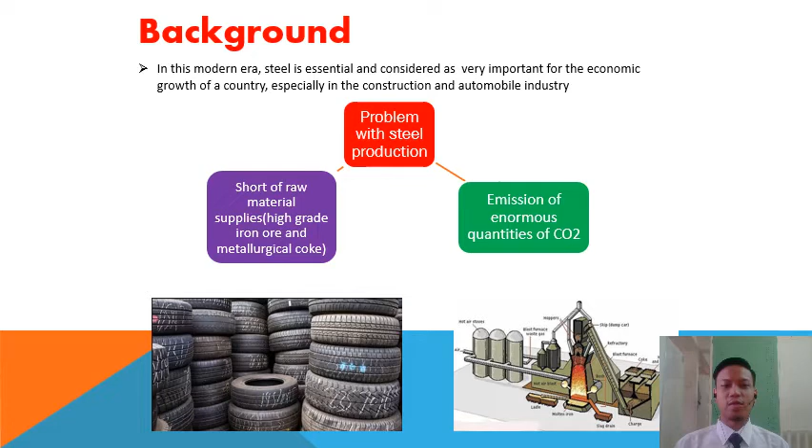As for the background of this project, in this modern era, steel is considered an essential and very important factor for the economic growth of a country, especially in the construction and automobile industry. However, the steelmaking industry is considered one of the largest energy consuming sectors. So the problem with steel production is that it has a shortage of raw material supplies, which is high-grade iron ore and metallurgical coke, and also the emission of CO2 in enormous quantities.

As for the problem statement for this project, it can be divided into four. First, the production of coke requires high energy and cost, where the coal needs to be heated up to around 1000 degrees Celsius for about 22 to 24 hours. Next, the production of coke also results in byproducts such as benzene, toluene, xylene, ammonium naphthalene, tar vapor, and also 218 kg of carbon dioxide.

Next, sintering also releases almost the same amount of carbon dioxide, which is around 216 kg. And finally, the management of waste tire disposal is challenging due to its poor biodegradability and carcinogenic property. So as a solution to this problem, char made from waste tires could be a potential resource to be used as a fuel for the iron ore. However, properties, conditions, and process have not been established yet. Thus, a research study regarding the utilization of the char tire for the sintering process should be conducted.

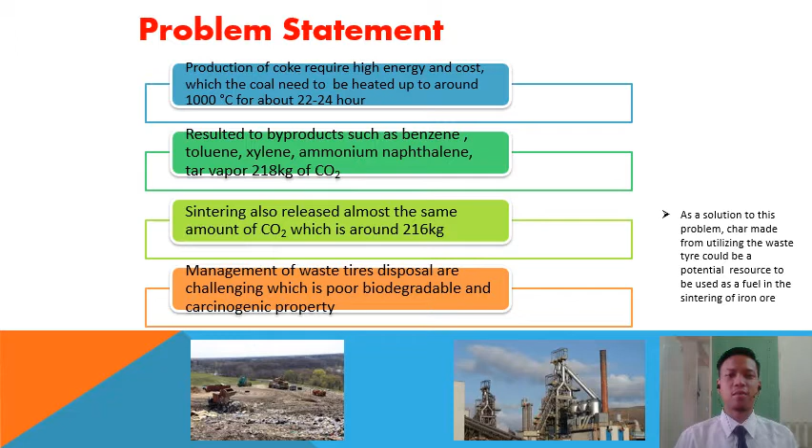So the proposed process for this project is that the waste tires will be collected and cut into small pieces, where they will undergo a pyrolysis process to produce the char tire. Then the char will be mixed with local iron ore and also water as a binder to produce the iron sinter.

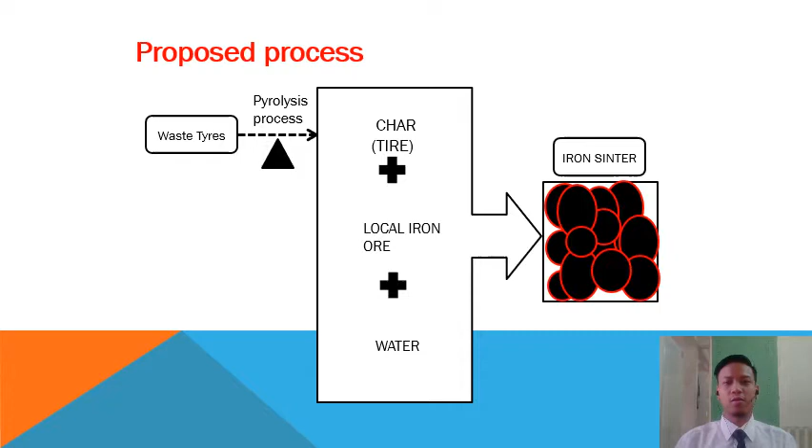For the whole methodology of this project, the raw materials will be collected, which are iron ore and tire, and the tire will be cut into small pieces to undergo a heating process at 550 degrees Celsius to produce the char tire. Then the char tire in the form of powder will be mixed with the iron ore at 6% and 8% ratio to produce the iron ore tire compound. Then the compound will undergo a sintering process at 3 different temperatures, which are 1100, 1200, and 1250 degrees Celsius to produce the sinter product.

As for the characterization involved in this project, XRF and TGA identify the elemental composition and also the weight loss percent involved in the reduction reaction. Next, a carbon analyzer identifies the carbon content of the char tire produced. Next, reduction degree analysis shows how much of the iron has been reduced. Next, volume shrinkage and density analysis study the effect of different composition and temperature on the sintered product, and also XRD to identify any phase changes in the iron sinter.

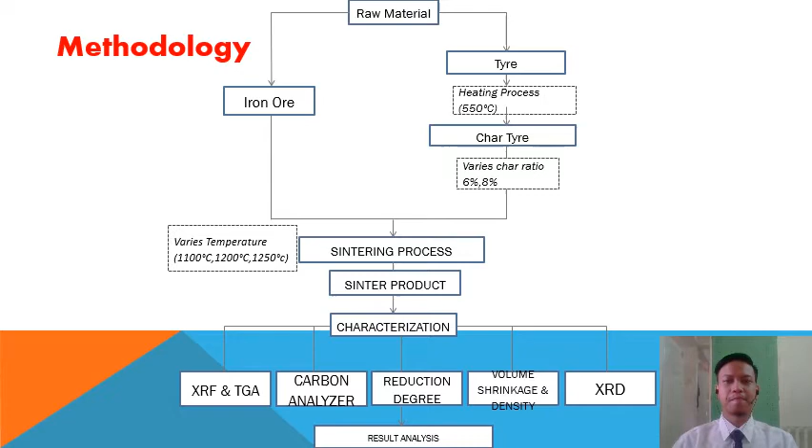So the objectives of this project are, first, to study the effect of different temperature and char tire composition on the characteristics of the sintered product, and second, to study the phase change of the sintered product.

For the results of the experiment, please take note that in the result section, there are some terms used for the iron phases, where the first reduction reaction is from hematite to magnetite, the second reduction reaction from magnetite to wustite, and the third reduction reaction from wustite to metallic iron phase.

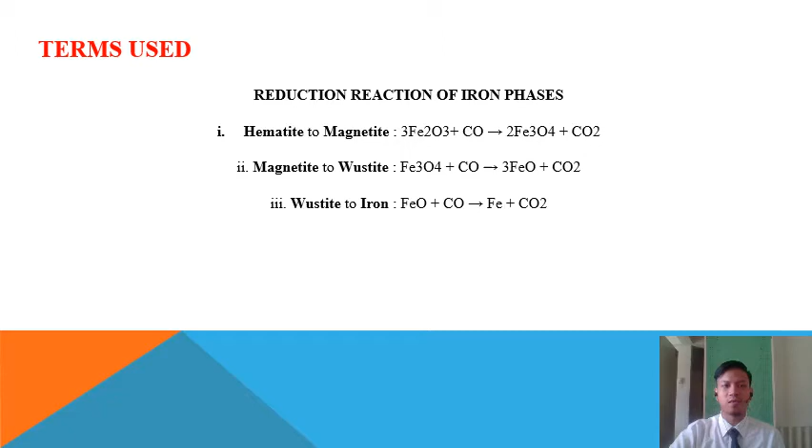This is the elemental composition of iron ore, which is the characterization result obtained using XRF. As you can see from the table above, this is the unnormalized composition in weight percentage, where XRF cannot detect all of the elemental composition, especially light materials. However, heavy metal elements are highly reliable.

So as you can see from the table, the iron content is 55.60%. This proves the material used for this project is a low grade iron ore, followed by the second highest composition, which is oxygen at 27.71%, and also aluminium, silicon, titanium, cobalt, manganese, which are considered impurities according to previous research.

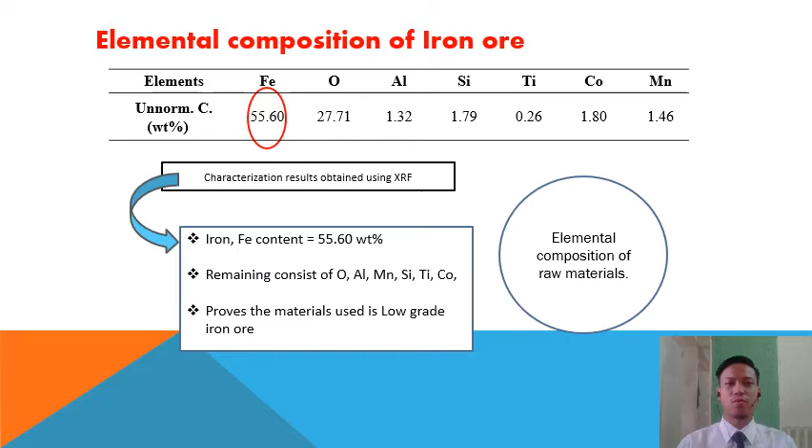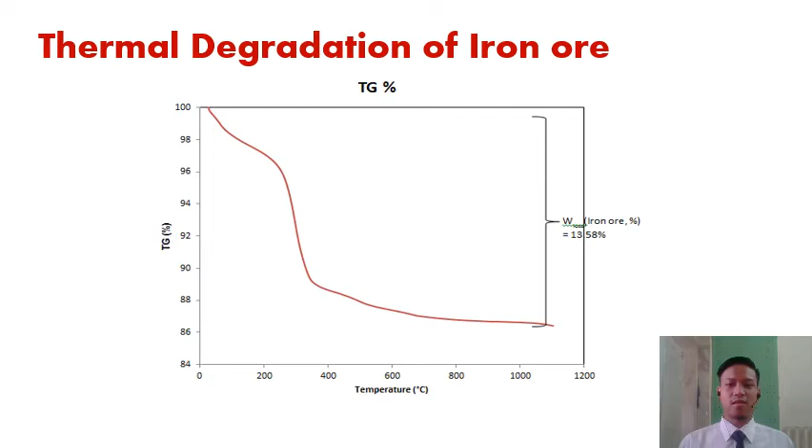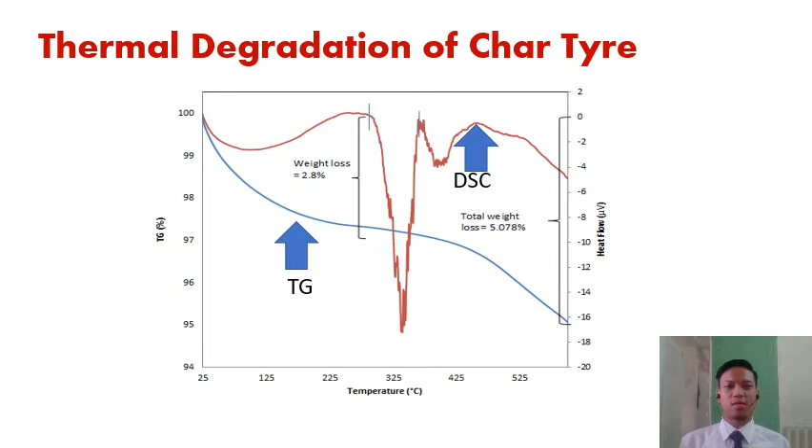Next, this is the thermal degradation of the iron ore. Based on the graph, the TG% or the weight loss in percent of iron ore throughout the experiment temperature is 13.58%. And this is the thermal degradation of char tire. From the TG% graph, the total weight loss of the char tire throughout the reduction process is 5.078%. Both values of the total weight loss are crucial because they will be used in the calculation of the reduction degree.

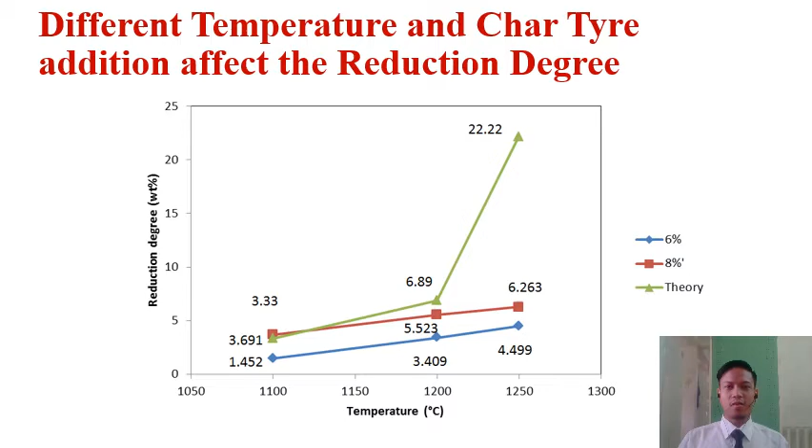Next, the magnetite has been partially reduced to wustite, and lastly, at 1250 degrees Celsius, the wustite has been slightly reduced to iron, with the majority of the iron phase consisting of magnetite and wustite. Even though at both compositions the third reduction degree did not reach the supposed theoretical level, there is existing wustite phase that has been reduced to iron, which can be seen in the phase changes later.

This is the effect of temperature and char tire addition on the volume of the sinter. As you can see, the volume shrinkage for the 6% is 53% at 1100 degrees, slightly increased to 55.30%, and lastly 57.30%. However, at 8% composition, at 1100 degrees Celsius, the volume shrinkage is 50.63%, followed by a slight increment to 56.93%, and a significant increase to 68.93%.

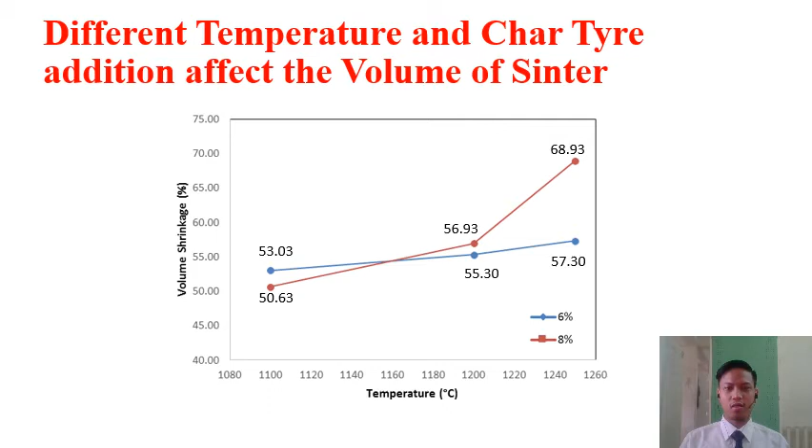This shows that higher firing temperature or higher sintering temperature and char tyre composition reduce the volume of the sinter product due to the densification of the sinter.

This is the effect of temperature and char tire addition on the density, and as you can see from the graph, at 6% ratio, the density of the product at 1100 degrees Celsius reached 9.84 gram per centimeter cube, followed by 11.73 and 13.09 gram per centimeter cube.

However, at 8% ratio, the density comes out higher compared to 6%, which is at 10.70 gram per centimeter cube, followed by a slight increment to 13.62 and a significant increase at 19.63 gram per centimeter cube. Thus, this showed that the higher sintering temperature will result in higher average apparent density with respect to the increased char tyre.

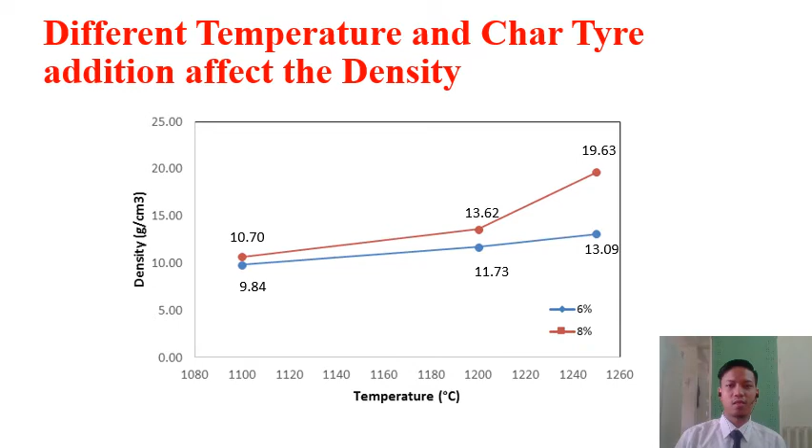This is the chemical compound composition of the original iron ore. From the XRD peak, it can be seen that the major phase of the iron consists of goethite, which is common in local iron ore due to its high water composition, followed by the second highest measuring peak consisting of hematite and also fayalite and wustite.

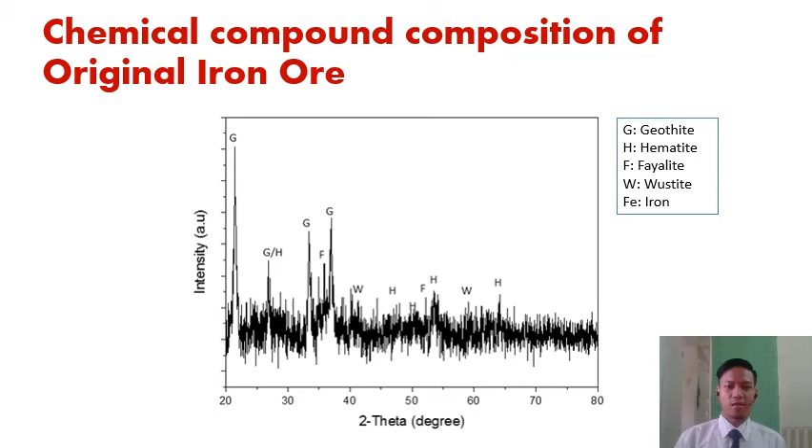This is the phase change of sinter product at different temperatures for 6%, compared to the original composition just now. At 1100 degrees Celsius firing temperature, there is still some goethite that has not been reduced to hematite, followed by slight magnetite phase, wustite, quartz, and also fayalite, which results from the bonding of iron and silica.

Next, at 1200 degrees Celsius, most of the hematite has been reduced to magnetite phase, and also wustite, followed by slight iron and also the existing quartz. Next, at 1250 degrees Celsius, most of the magnetite remains, and some also converted to wustite, and there is also a slight metallic iron phase, and quartz remains.

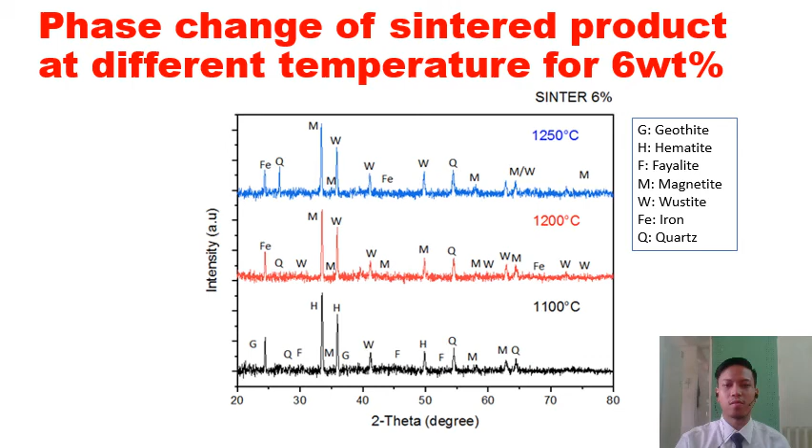And this is the phase change of sinter product at different temperatures for the 8% ratio. As you can see from the peaks, different from the 6% composition, most of the goethite has been reduced to hematite, which makes the major existing phase in the sample at 1100 degrees Celsius hematite, while some of it also reduced to magnetite, and slight quartz can also be found.

Next, at 1200 degrees Celsius, the hematite has been reduced to magnetite, and some magnetite has started to reduce to wustite, with slight metallic iron phase observed, and existing quartz from the original sample. Next, at 1250 degrees Celsius, most of the magnetite reduced to wustite, while some of it remains, and some of the wustite has been slightly or partially reduced to metallic iron phase, and the quartz remains.

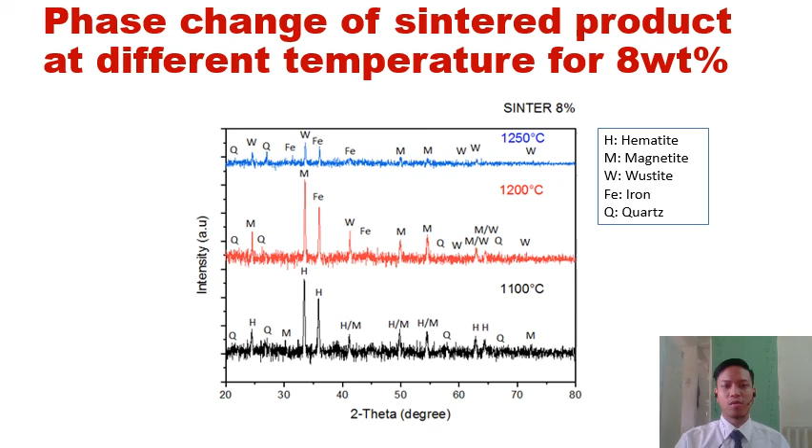As for the conclusion of this project, the characterization of the tire-derived char showed high possibility of the char tire as a replacement of coke due to its high carbon content, ranging from 65% to 86% from the carbon analyzer test. Second, this experiment proved that higher char content results in higher weight loss, which contributes to higher reduction degree with respect to increasing temperature.

Third, based on the results, the highest volumetric shrinkage, density and reduction degree achieved for the iron sinter was the sinter with 8% char tire content, which are 68.93% of shrinkage, 19.63 for the density, and 6.263% of reduction degree respectively at 1250 degrees Celsius, followed by the phase change from hematite to majority of wustite and metallic iron. This indicates a higher amount of char was required to achieve higher reduction degree.